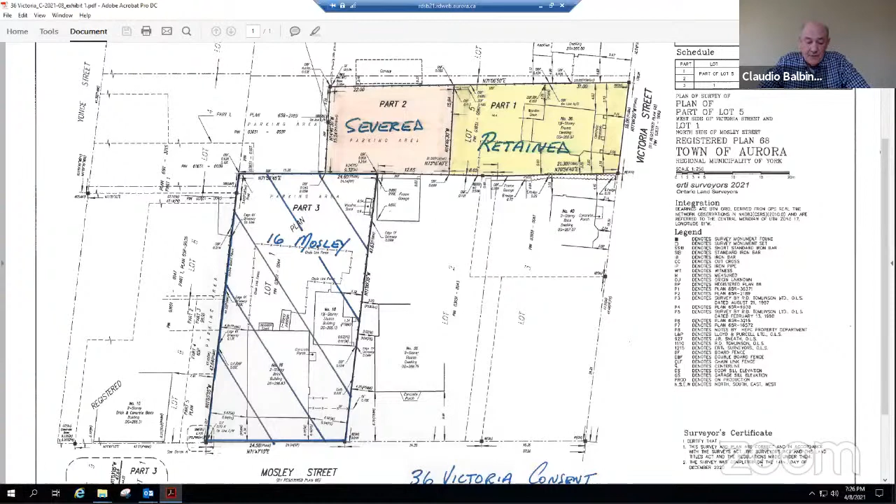I'll be happy to answer any questions you may have. Thank you.

Thank you very much, Mr. Balbinot. I appreciate that. And just for the record, I was part of the Committee of Adjustment back in 2018, and I remember this application, mostly from actually this one now coming forward. It did jar my memory, and I did recall it once I saw the application.

I'll ask, my understanding is that aside from the letter or email we received, those were the only comments from the public. I believe you addressed that in your presentation, Mr. Balbinot, so I appreciate that. There is no one from the public this evening, I believe, Bersanthi, if I can just get that reconfirmed. Through you, Mr. Chair, we have no members of the public, and that's the timer for the presentation. Okay, thank you.

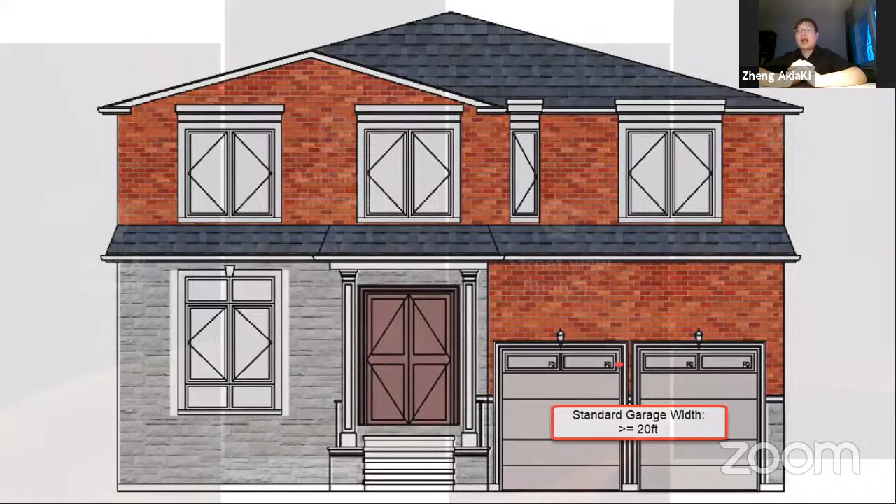So today we're going to have 4 sections to let everyone go through my project and understand the logic and reason behind these variance applications. So we have 4 sections.

First one, next please. So thank you, Mr. Chair. We already went through the data and statistics, so I won't spend too much time here. Next, please.

So right now everyone knows we have some minor variance requests for the side setback from 3 meters to 1.5 meters. Next please. And also we have a lot coverage, and the GFA increased a little bit. So I think they're all very minor. Next, please.

So today I will focus on the reasons and the logic behind these applications. We're going to go through 4 subsections, topics today. First, must and need and guideline requirement, and feng shui and culture. And also, I will answer some of the town's concerns in the COA reports. Next, please.

So first, we have to express our need, because why we want to apply for these minor variance applications. We believe for our family, this application is a must and a need. So we have 4 sections here, 4 needs. First one is sunshine. The second one, orientation, personality, and the areas.

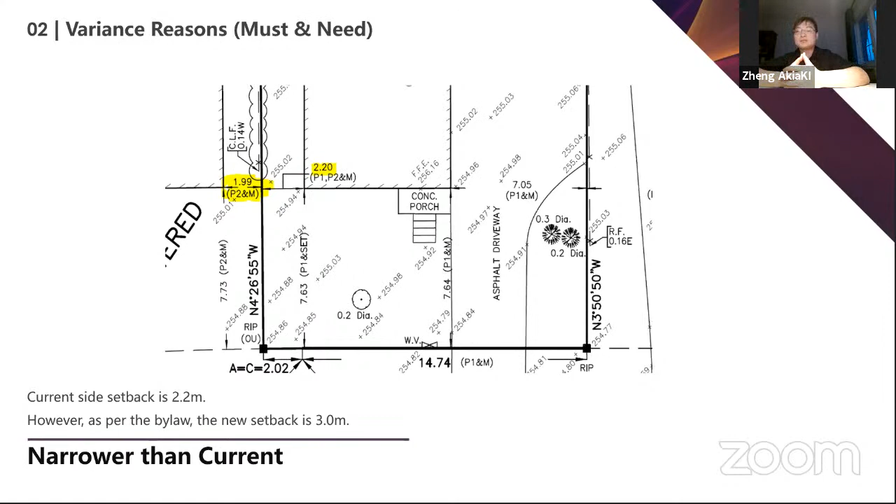So I took some pictures in my neighborhood and found many new second floor buildings have been rebuilt. I took measurements from Google Maps, and it seems the Town of Aurora already approved a lot of these buildings with a narrow setback. I cannot step on other people's property to measure myself.

So roughly I measured on the Google Map, but obviously all of them are even narrower than my request. Some are just 4 feet, 1.2 meters. I guarantee all those houses, though I cannot show their address, are in the same stable neighborhood as mine.

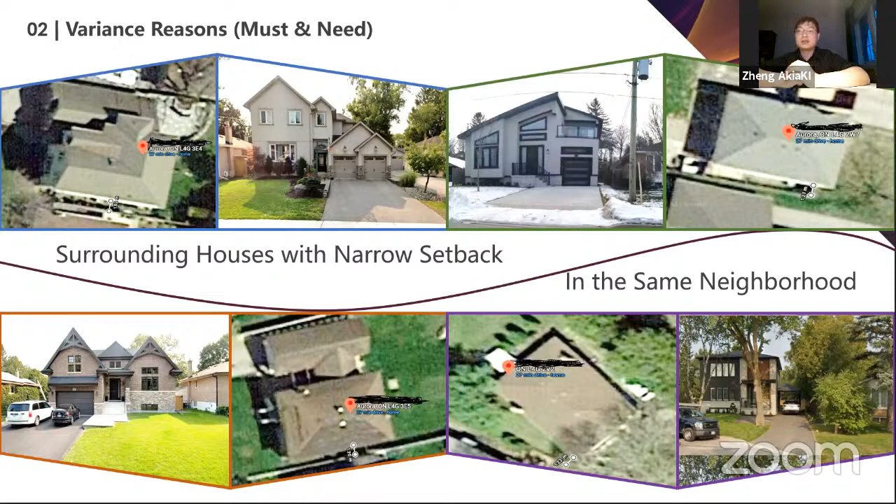Also, as per the new urban design guideline released by the Town of Aurora, there's a request under Section 27. My wife and I work very far from home, our offices are far away, so we have to leave very early, especially in winter, when there's no time to clean snow.

So we want to keep two car garages. But as per the new design guidelines, the front garage should not take up more than 50% of the width of the main front elevation. Since the standard garage width is 20 feet, that means new houses have to be a minimum of 40 feet wide, otherwise they cannot meet the guideline's request.

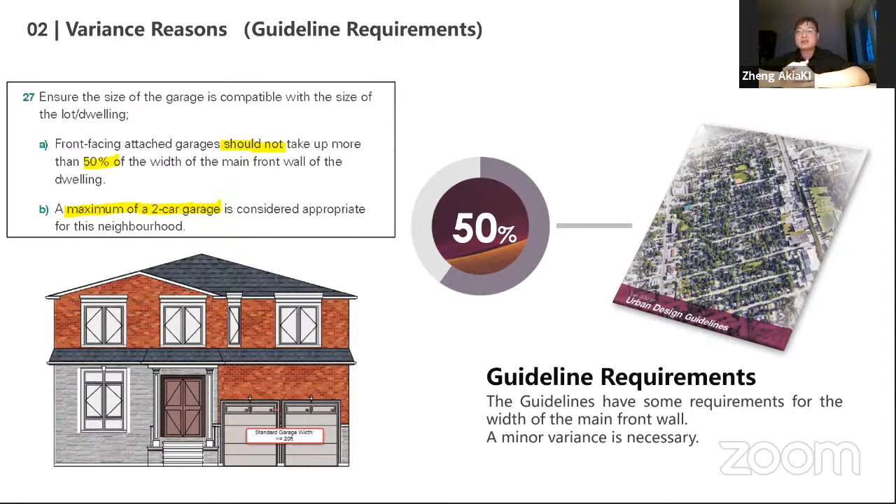Also, I would like to say something about feng shui. I'm not sure if everyone has heard of this theory, but we Chinese really believe in it. Feng shui is a Chinese tradition, a theory about the surrounding environment and its impact on people and their living space. Let's look at the front elevation picture of the houses we'd like to rebuild.

This is a very nice tree, and I spoke to Tom Ferrara—they want to keep these trees. Right now I placed this tree on the left of my new entrance. Based on Chinese feng shui theory, this is very good feng shui. We call it the 'great dragon tree.' It symbolizes protection and nurturing.

We also believe fortune, luck, and happiness are like invisible fruit, so with no blockage, these things can flow through your house directly. This design has always had very good feng shui theory as its basis.

But right now, if I narrow these houses as per the city's request, like a 3 meter setback, and we still want to keep two car garages, we have no choice but to place the entrance directly behind the trees. Then the trees change to very bad feng shui—we call it 'hard piercing sha.' It becomes a blockage to fortune, luck, and happiness. In Chinese theory, it's very bad feng shui.

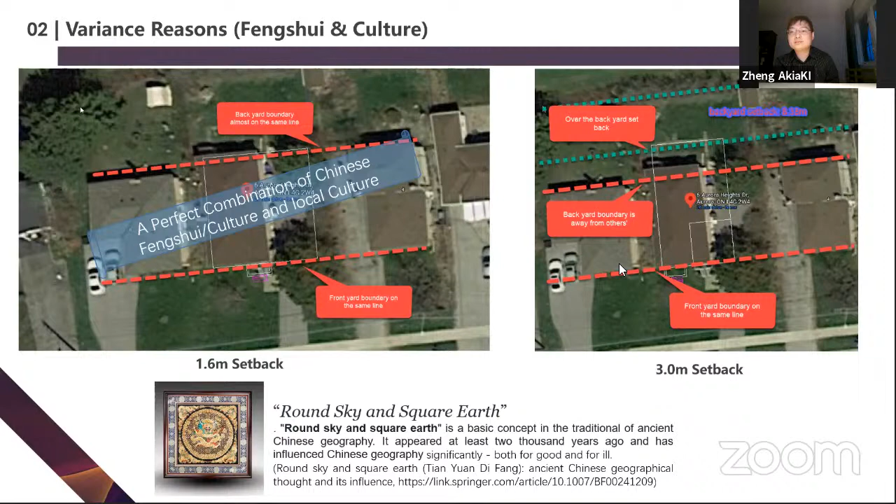Next, please. So right now, let me answer some questions.

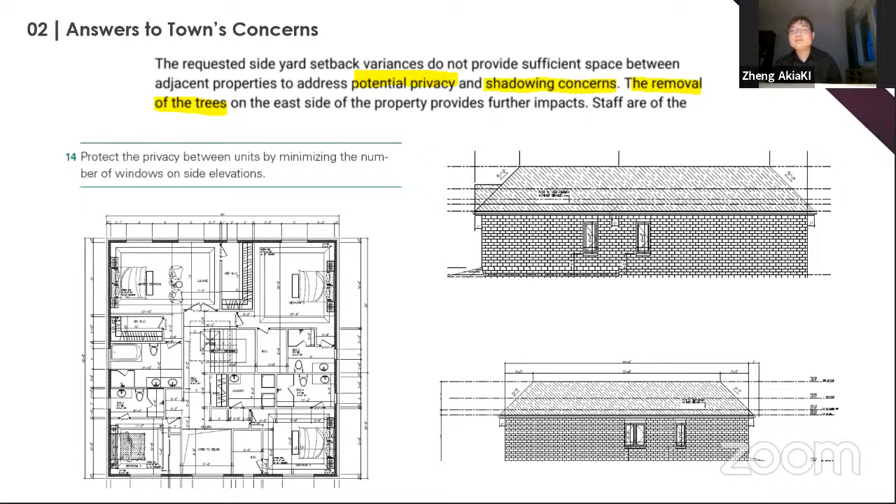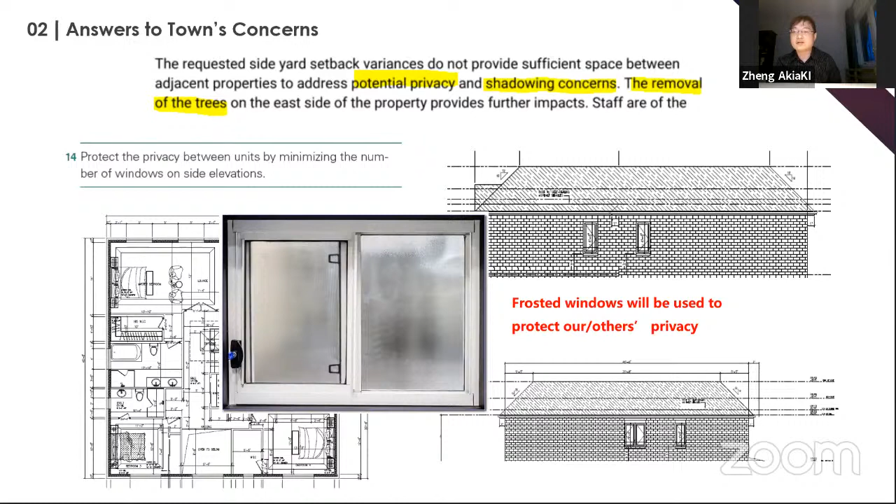So my plan is, next please, to use frosted windows there. Of course it's our concern too, to keep our privacy. So even if you want, we can change it to fixed frosted windows or change to sky windows. But I don't think privacy should be a big concern.

Next please. Also, per the bylaw in other cities like Toronto, Markham, Richmond Hill, they all request 1.2 meters. But right now my request is 1.5, so still beyond their requirement. Next, please.

The next one is the shadowing concern. I did some past simulations on several programs. I think it should not be a big concern because you can see this is a typical day during the winter — the sun's passage is always on the south of the building on Aurora Heights Drive. That means there are no buildings that will block the sunshine to my neighbors, because the sun is always on the south side of the buildings. I've run this simulation on different programs with the same result.

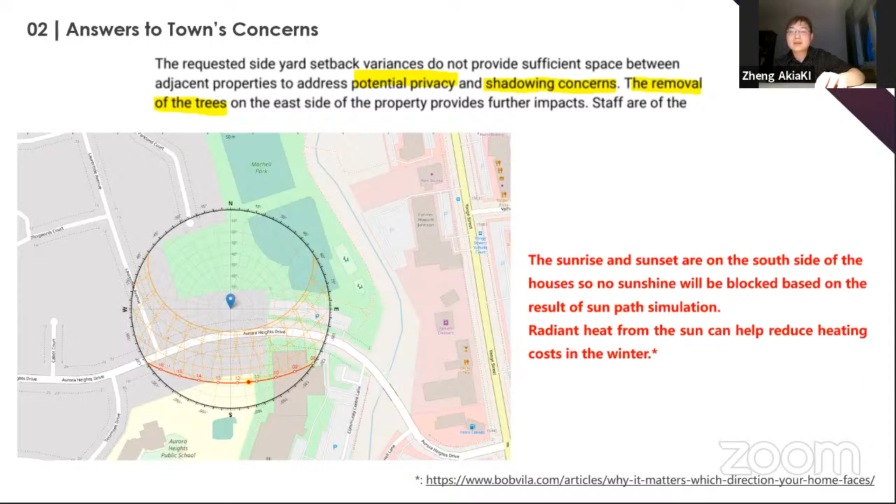Next one, please. I also took some pictures in my neighborhood showing those houses and their neighbor relationships. I didn't see any blockage of sunshine, and I think 1.42 meters is already good enough for privacy and sunshine. But right now I have 1.5 to 1.6 meters, which is good enough.

Next one. For the removal of trees, I already have an arborist report ready here. My consultant told me I just need to plant a couple more trees in my yard, which is good enough to make up for the loss if I have to remove any. But right now it's not 100% removed, so it should be no concern to the Town of Aurora. Next one, please.

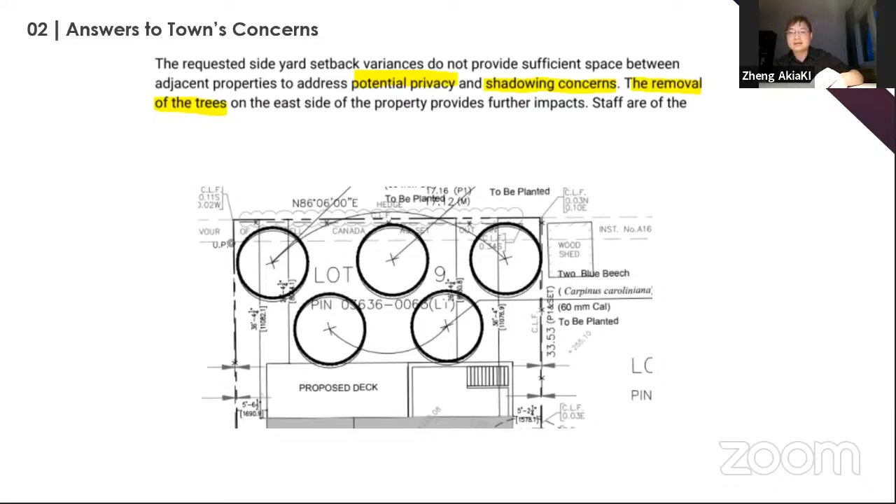This section I'll go through quickly, just to review the analysis of how my house can fit into this neighborhood. Next one, please. So actually, when we started our project, this is the house design we preferred. But after conversation with the Town of Aurora, we realized this house was too modern and maybe not good enough for this neighborhood, because this neighborhood is already identified as a stable neighborhood. So we kept asking ourselves the same question: how can we fit into this neighborhood?

So that's our answer: we want to use the same elements already being used and existing in this neighborhood. We don't want to use materials that have never been used in this neighborhood.

So all this design, gone. Next one. So we want to keep the same front line and the same back line, so make sure our building can line up with our neighbors.

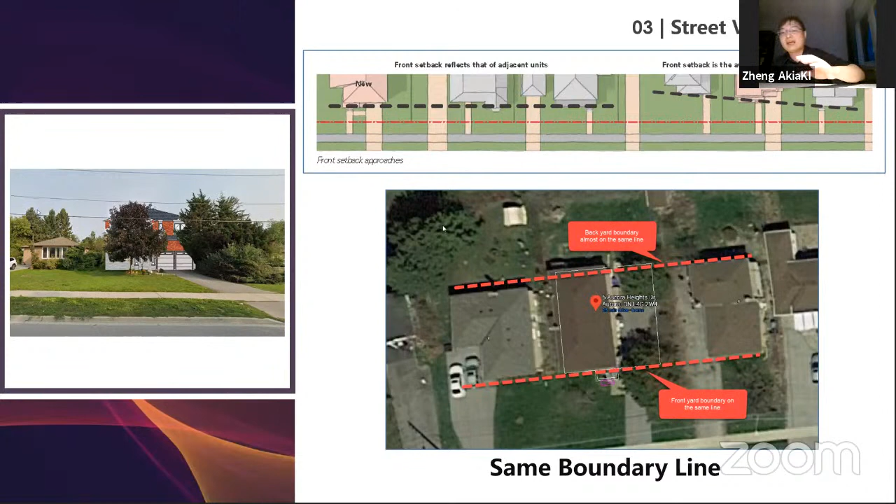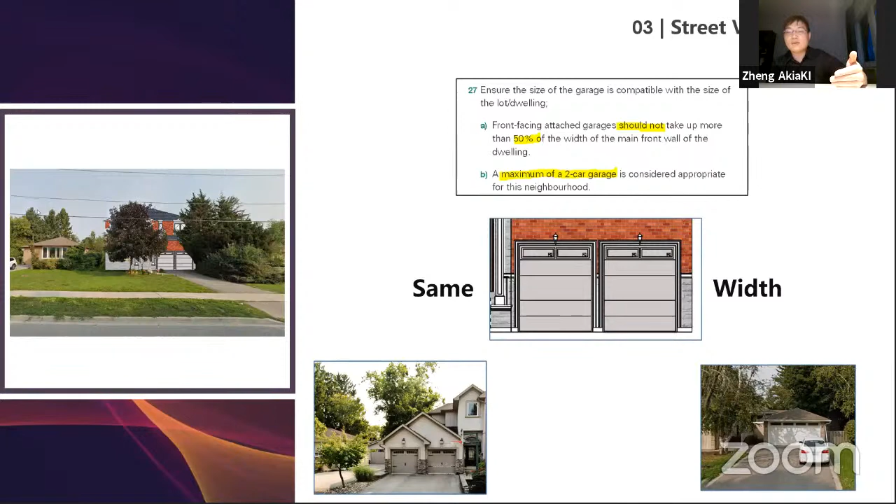And also we want to use all the elements, like even the garage doors, you can easily find in our neighborhood. I'm not using any new doors, it's existing there. And same material, I'm using the material recommended in the design guidelines, red brick and stone as a secondary material.

And you can easily find the typical houses, several houses in this neighborhood. Also same recess and the same roof pitch. Every element you can find in my house, you can easily find in others in this same neighborhood.

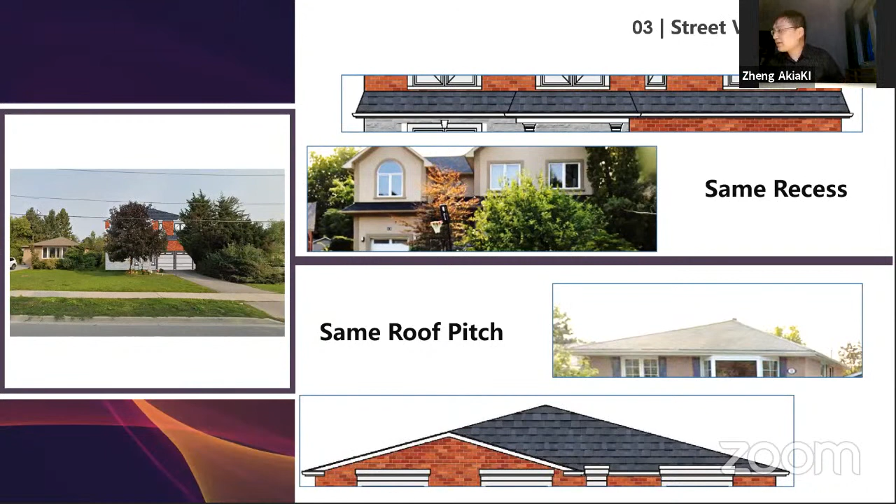And that's it. Sorry, I'm taking a little bit more time because I never expected previous applicants could go so fast today, I'm so surprised. I think I had to wait until 9, so I'm a little bit surprised and shocked. So sorry, and that's it. Thank you so much, thank you very much.

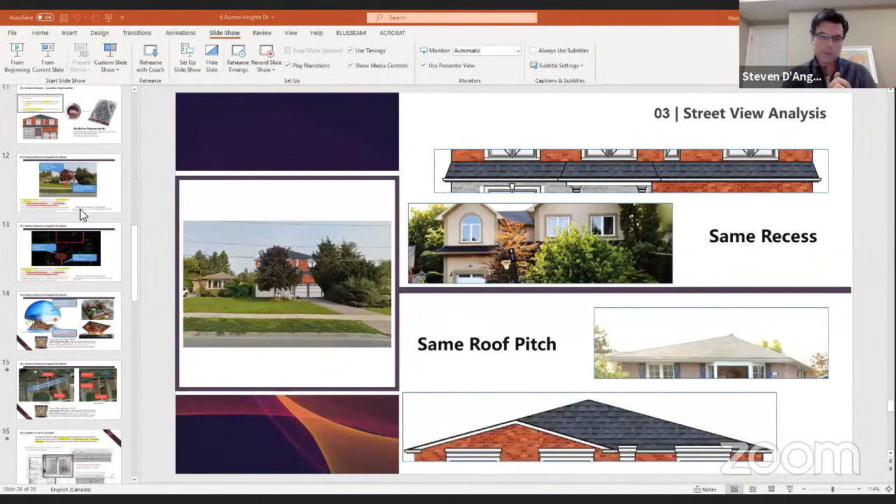And I visited your street this afternoon. Rashanti, if I could trouble you to bring up the slide that showed the proposed development beside the... yes, that's fine, I think there's a bigger one of the picture on the left there. Thank you. So, Mr. Zheng, when I went to your street and I looked down your street...

Your neighbor to the immediate, well, left as we're looking at it here, every single house, with the exception of the one on the corner, was a bungalow that I would say is probably under 1,500 square feet. And even going to the maximum permitted gross floor area and lot coverage, you're likely going to be out of character.

So personally, I do agree with the town on applications A and B. With respect to C and D, my concern is even going to what is permitted under the zoning will put you out of character, which is the intent of the stable neighborhoods. And obviously that's permitted, so we don't have any say into that tonight.

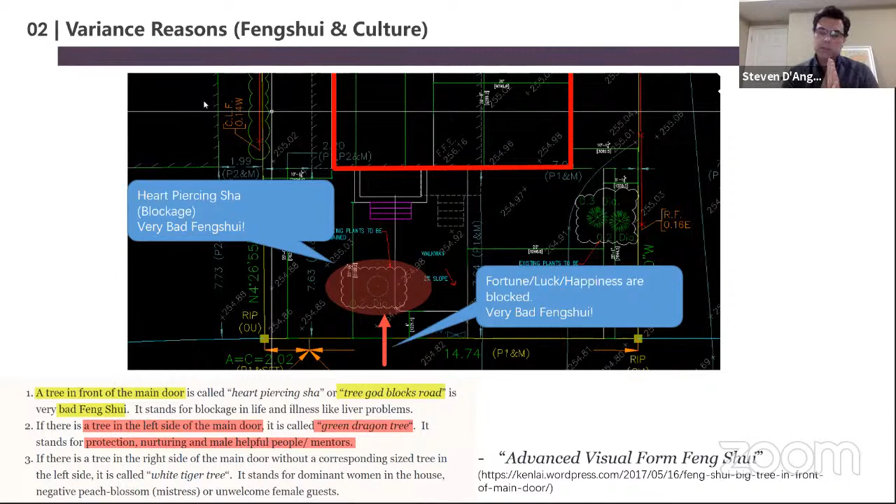But I think your house is going to stick out. Even though C and D are minor in nature to what is permitted, when I look at your street, it is a significant deviation to the existing developments there, the old developments.

And I believe the examples that you're comparing against were probably built under a different zoning. For that reason, and I appreciate all of the aspects that you brought to us tonight in terms of what your needs are, but we have to consider the community at large.

There was a lengthy process to determine, to gather recommendations for how to approach stable neighborhoods. That resulted in a zoning amendment to the zoning bylaw and this new gross floor area. In my opinion, while I do agree that the variances you're asking in C and D are minor, I think we would be setting a new standard that is extremely incompatible to your streetscape.

And I took about 5 minutes driving around, and I could not find any houses in your immediate vicinity that would be larger or even comparable to what is currently allowed by the zoning. I'll just ask you, once again, if you look at this picture, do you feel that your proposed house would represent stable growth for your neighborhood and is compatible to the other houses on your street?

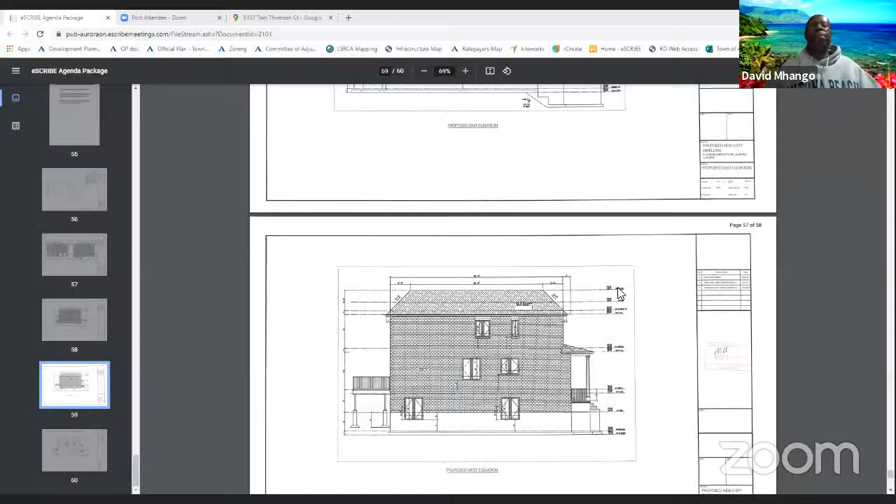You see, in the report, page number 5 from the back of the report. Yeah, this one here, yes. Yeah, okay. So the reasoning, I want you to understand the reasoning. The reasoning is...

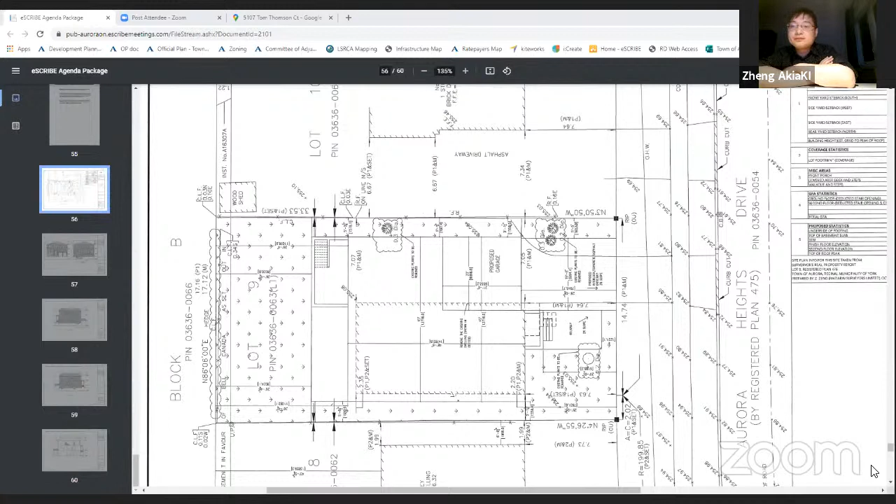Would you have enough space to construct a swale? Yes. Flows? Yes, 5 feet is good enough for any drains. It's good enough because in other cities, and I spoke to some builders there, they only need like 1 or 2 feet. That's good enough for them. Okay, so I just wanted to confirm from you.

Yeah. Lastly, I have a question to the staff, and I want you to really listen to this question, look at your notes carefully, and be able to answer. So I don't need this drawing. It's about the official plan, on page 3 of 9. The statement there, I want you to really look at it and interpret it to us.

Okay, I'll read the part from the official plan. It says the subject property is designated stable neighborhoods by the Town of Aurora's official plan, which seeks to ensure that residential neighborhoods are protected from incompatible forms of development, while allowing the neighborhoods to be enhanced over time. I'm emphasizing 'while allowing the neighborhoods to be enhanced over time.' Further, the neighborhood designation provides for single detached dwellings as a permitted use.

So my question is, I want you to interpret or explain to us what you mean by 'while allowing the neighborhoods to be enhanced over time.' The reason I'm asking is that, as Steve showed, or even the applicant showed, his house was a bit bigger than the others in the neighborhood. Those are older houses. As people are changing the houses, they're changing the nature of the houses. As you're allowing neighborhoods to be enhanced over time, is that what you expect? And if so, are you still expecting to meet the zoning requirements, for example, setbacks of 3 meters? I want you to explain in this context of allowing the neighborhoods to be enhanced over time.

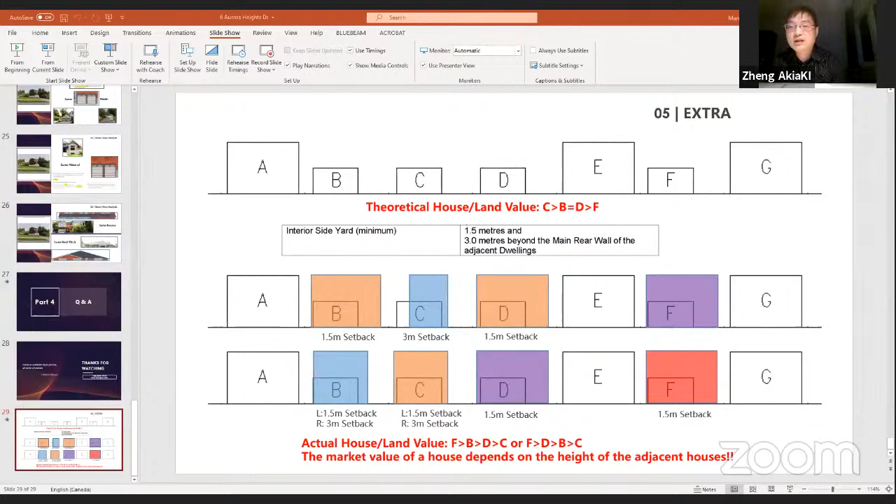I apologize, I had no plan to show this slide, so I put it on the last page just in case. But this is the research and results I got after a couple months studying the bylaw and the guidelines, and I hope the city can also consider that these applications will cause such consequences in the future.

Thank you. Mr. Zheng, can I ask you a question then — this last slide is a very interesting slide. Was that shown to staff as part of your application, or as part of a follow-up to it?

I said at the very beginning why. Actually, I was in a dilemma the past couple of weeks because this slide was ready a couple of weeks ago, but I wasn't sure if it was appropriate to show in the COA, so I put it at the end just in case — at the beginning I didn't want to show it.

The reason I'm asking is because it's an interesting theory — that if it had been put into the hands of staff and given the opportunity for them to actually qualify it, what you've given us is a demonstration of what could happen as part of an ongoing transition. We call it communities in transition.

Because you've brought it forward, there's no way for us to qualify that. It would have had to have gone to staff, and staff would have been in a position to say, by the way, as part of the application and part of the justification for presenting this as what could happen as part of a development through the process and meet the requirements of the zoning bylaw, this is a case that demonstrates that ultimately I might have been able to do this in the future.